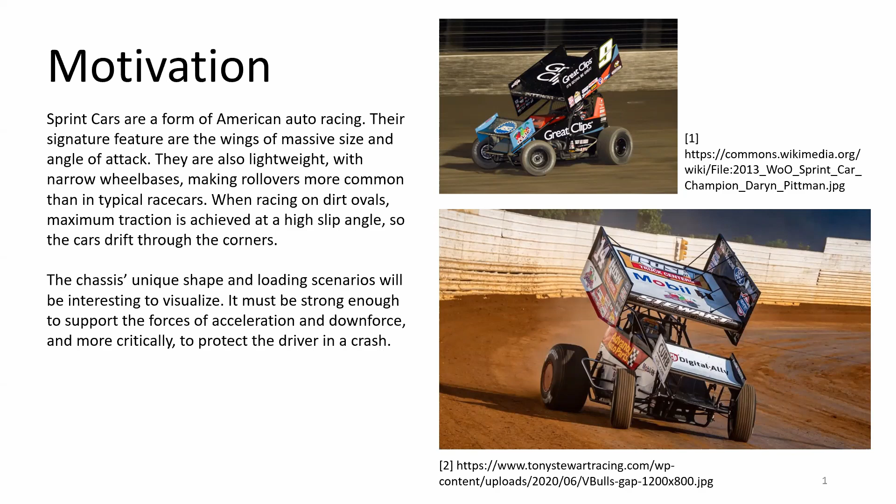And we can see here the layout of the chassis structure. The geometry was simplified a little bit. As you can see from the original pictures, the chassis is a little bit more complicated than what I've modeled, but it's a fairly accurate simplification.

The dimensions were based on real-life short track rules, based on the rules of the Selinsgrove Speedway for the 2020 season. The rules indicated 4130 steel, which is where I got the material properties from, and I also assumed that both wings were trimmed to 25 degrees, just the angle of attack of the wings, which is pretty common.

Assumptions for the loads: g-forces act on the engine, the driver, the top wing, and the front wing. So those are just the 4 elements in this theoretical car that are going to have mass. I'm assuming that the chassis does not have significant mass, and I'm not taking into account other aspects of the car, such as the drivetrain or the axles or tires.

The aerodynamic forces will be calculated from coefficients gathered from this study, which gives the aerodynamic coefficients at various angles of attack and velocities and side slip angles.

And finally, I'm just indicating that the g-forces and aerodynamic forces that are occurring on the engine, driver, top wing, and front wing are going to be transmitted to the chassis at the points where they are connected to the chassis. So you can see here's the layout of all that. So the top wing is, for example, mounted on this node, this node, this node, and this node.

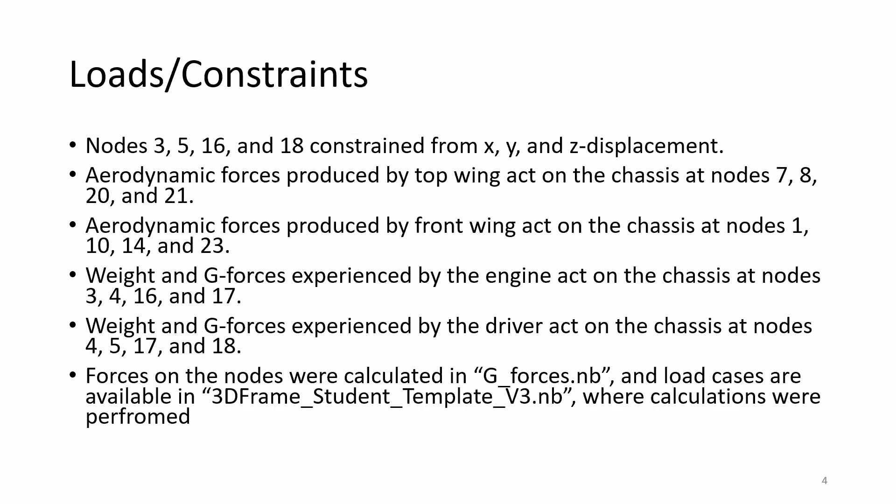I've assumed that if you take a look at the sort of rectangle connecting the nodes, for example, this is where the engine connects, right here, here, here, here. And if you look at this rectangle, I just assumed that the center of gravity acts kind of in the middle of the rectangle at some unspecified height. Same thing for all the other masses, such as the driver, the top wing, and the front wing.

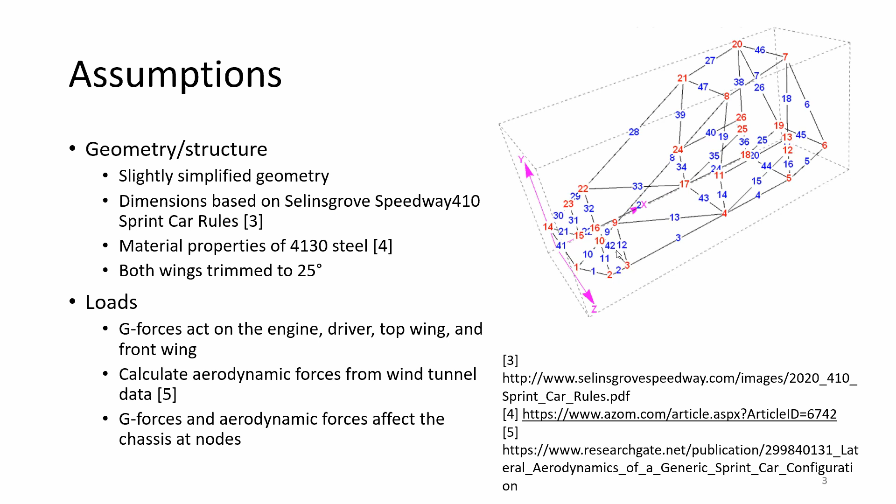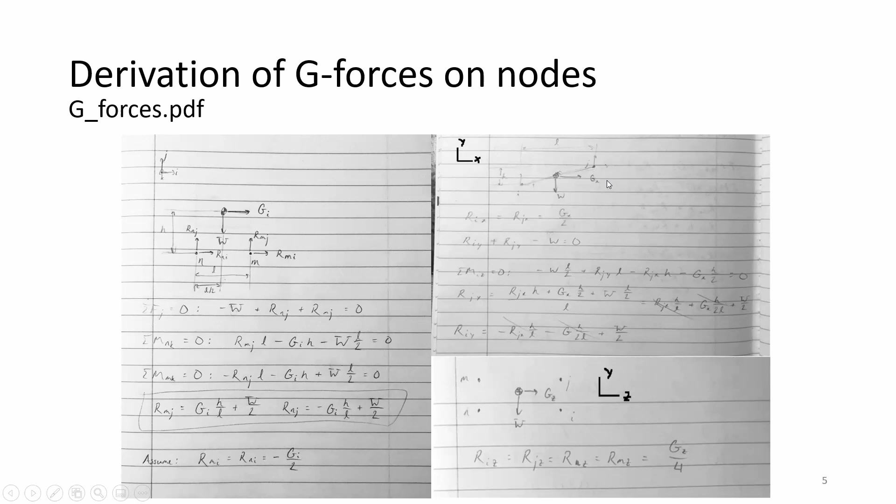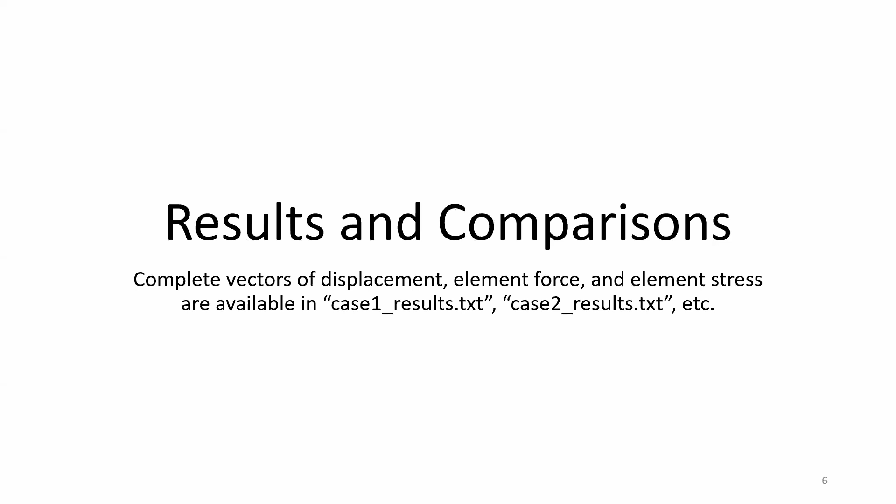The top wing and the front wing are actually mounted at an angle of attack, and so for those, I just also assumed that the center of mass was also in between the nodes in the y direction this time, in addition to the x and z direction. The full results are available in these files. They, of course, would not fit in a PowerPoint slide even if I wanted to, but I have included the maximum displacement forces and stresses, and just some comments on each of them and some highlighted diagrams.

So for the first load scenario of forward motion at 60 miles per hour, we can just see the main effects, no g-forces. The main effects are just the aerodynamic drag and aerodynamic downforce. And of course, we see some downward deflection where the top wing is here. There's actually a little bit of upward deflection in the rear of the car.

And even though the top wing is mounted here, that's just indicating that this deflection is having kind of ripple effects throughout the chassis, interacting throughout all the members in the middle here. It somehow leads to this one deflecting upwards. The top, pardon me, I keep mixing them up. The front wing has a little bit of deflection, not as much as the top wing. And some of that may even be because of this displacement pushing elements downwards and then pulling these elements towards it as it gets pushed downwards.

Maximum displacement is extremely small, which is to be expected. Nothing crazy is happening to the chassis right now. Maximum displacement occurs in the rotation about the y direction in this element, and the maximum forces occur here in element 15, just kind of a little bit underneath and to the side of the driver.

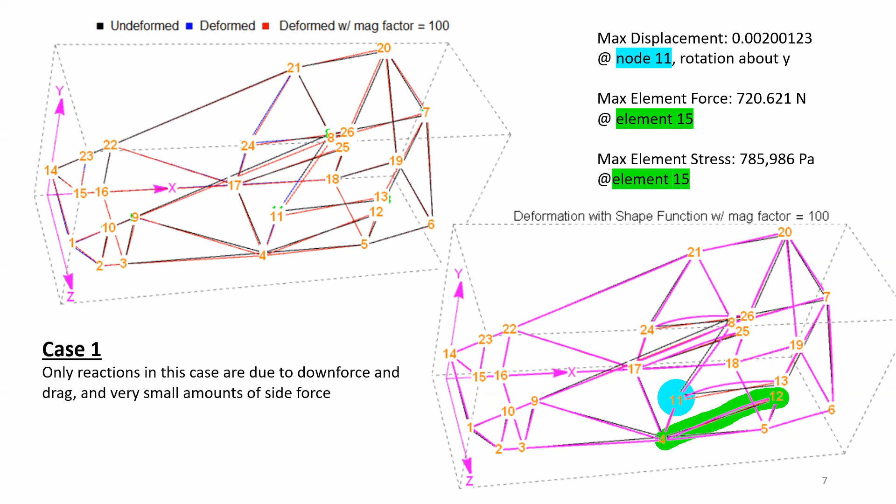In case 2, it's the same case, but just at 120 miles per hour. And so as we would expect, we see the same things just magnified. And yeah, the maximum displacement increases, as does the maximum element force and element stress. But overall, same ideas. Case 3 is the turning motion, the car drifting through a left-hand turn.

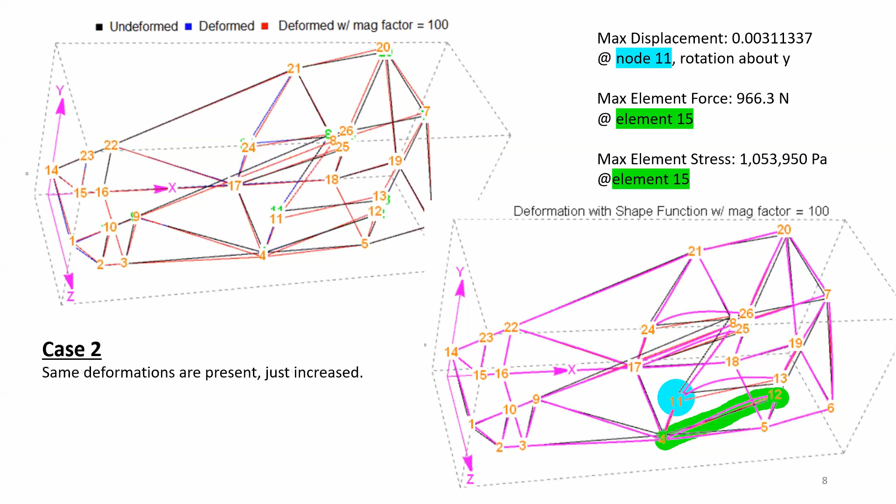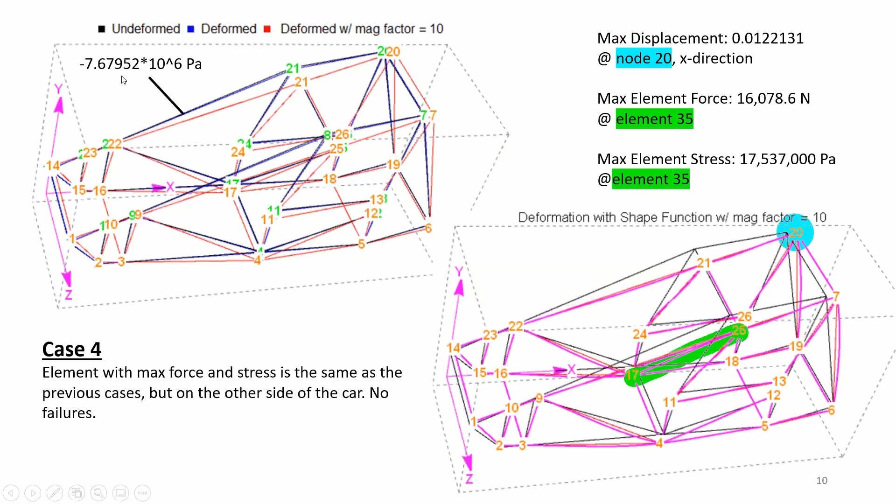And what that indicates to me is that these weakened elements around the engine, because they're weakened, they're not as strong as they were in case 4, and they cannot pull these towards the center of the car anymore. I also made note of the stress in this element on each car, and it is, of course, a larger magnitude in case 5.

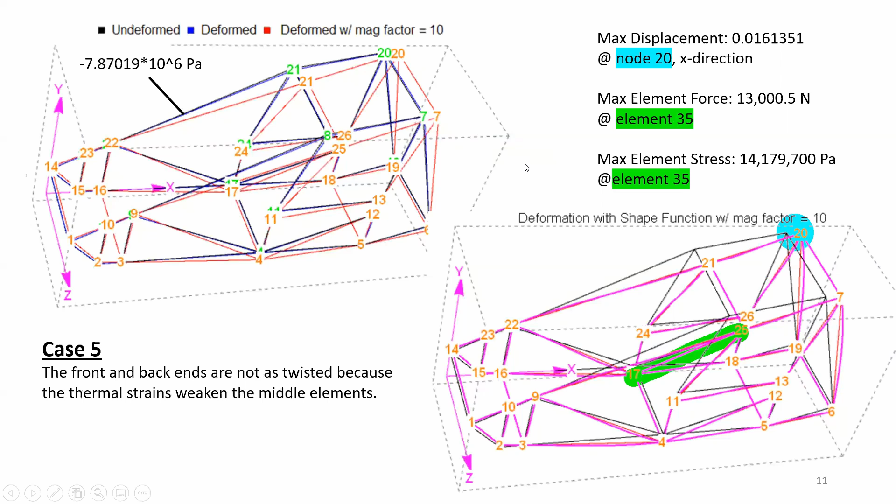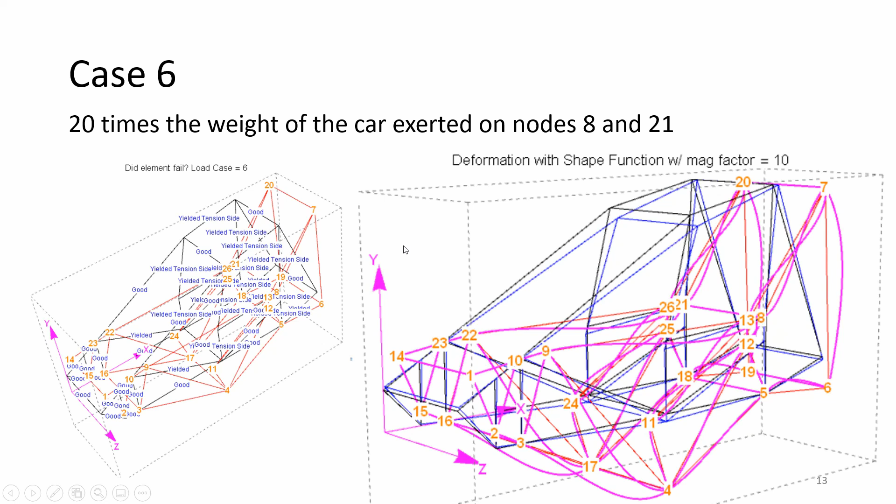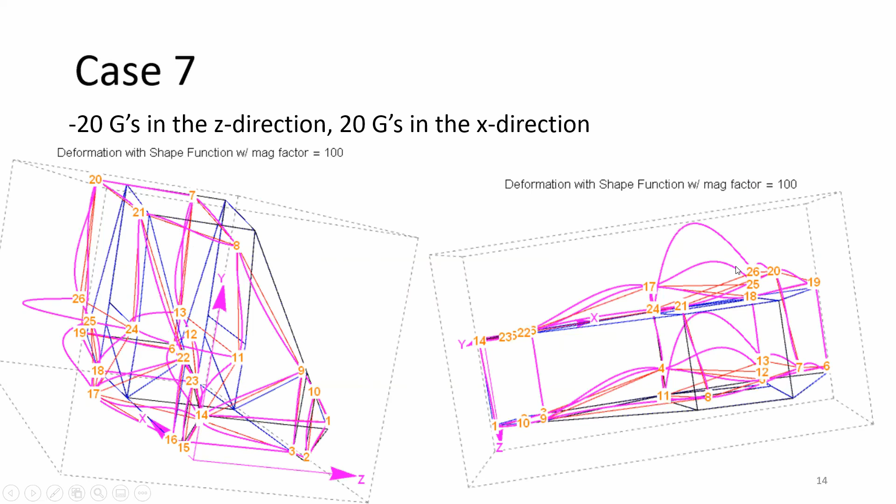Case 7 is a fun one with just 20 G's throwing you to the right and 20 G's throwing you backwards. And exactly what we would expect occurs. The weight of the engine and the driver really throw nodes 4 and 17 outwards to the right. And the weight of the top wing really just throws the top out to the right. And we get this interesting twisting motion. And we can see just how stressed these cross members around the driver are, despite them not directly connecting to any of the forces.

So, in conclusion, the chassis holds together in all the realistic scenarios. It's over-designed for safety, which is a very good thing. It's well protecting the driver. It does flex during normal driving scenarios. However, that's just deformation on the order of millimeters, nothing that's going to affect the balance of the race car.

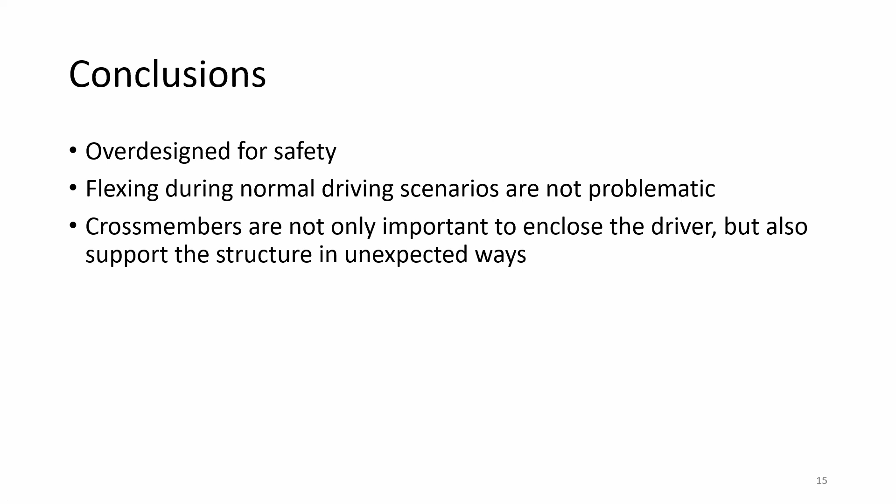And third, cross members are not only important to enclose the driver, but also support the structure in unexpected ways. We saw that even though those nodes aren't directly connected to the forces, they have a lot to do with keeping the structure together and keeping it stiff.